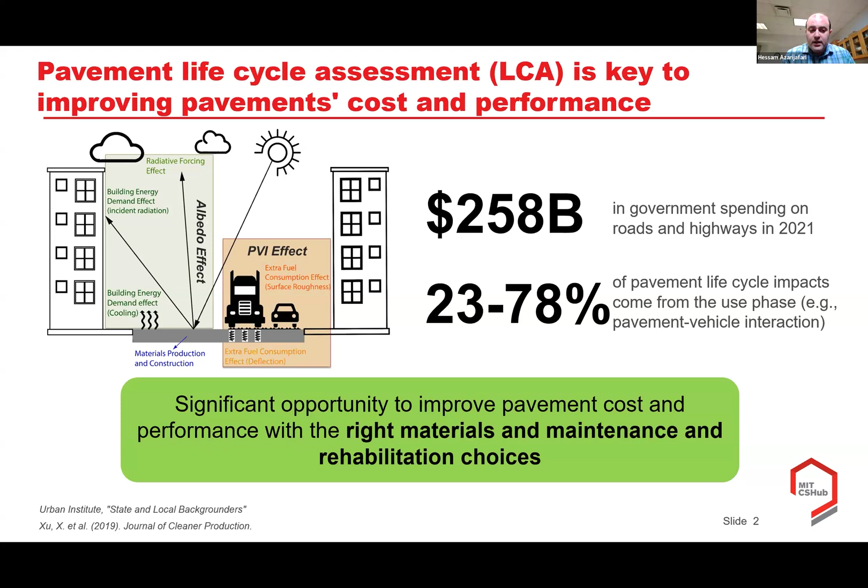So the environmental impact is not only the embodied emissions or environmental impact associated with the materials production, but 23 to 78% of these impacts come from the use phase and the impact of pavements on other parts of our built environment. But there is much awareness, fortunately, around including the life cycle and leveraging pavement as a solution in order to decarbonize the built environment.

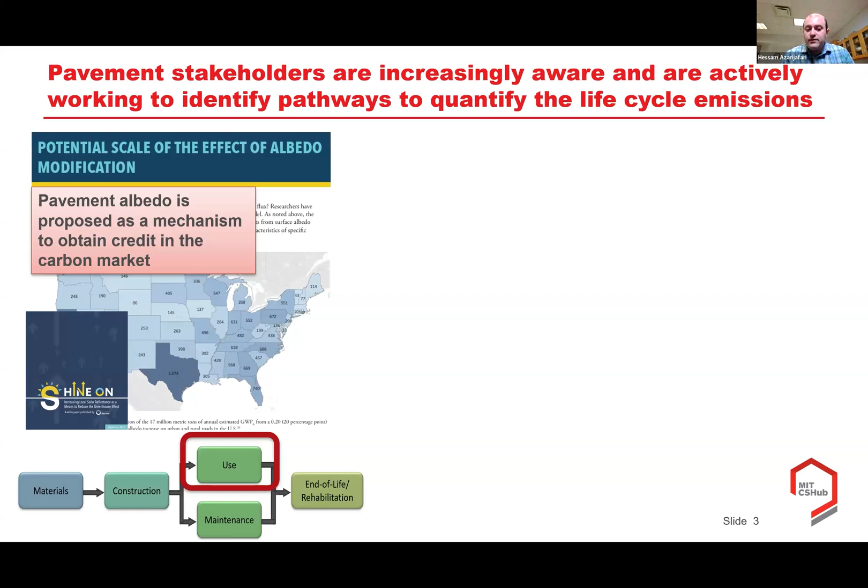This is a report that I'm sharing here talking about pavement albedo as a mechanism to obtain credit in the carbon market in general. So obviously, this is one part of the use phase. We have momentum around using carbonation or carbon uptake as a part of the EPDs for cement-based products. So pavement obviously is an important end-use application, and it's going to be included in the EPDs.

And on the other side, more recently, the Federal Highway Administration has formed a use stage technical subgroup to review the current methods and available tools in order to quantify the pavement vehicle interaction effects caused by the surface roughness of the pavements and also the structural performance as well.

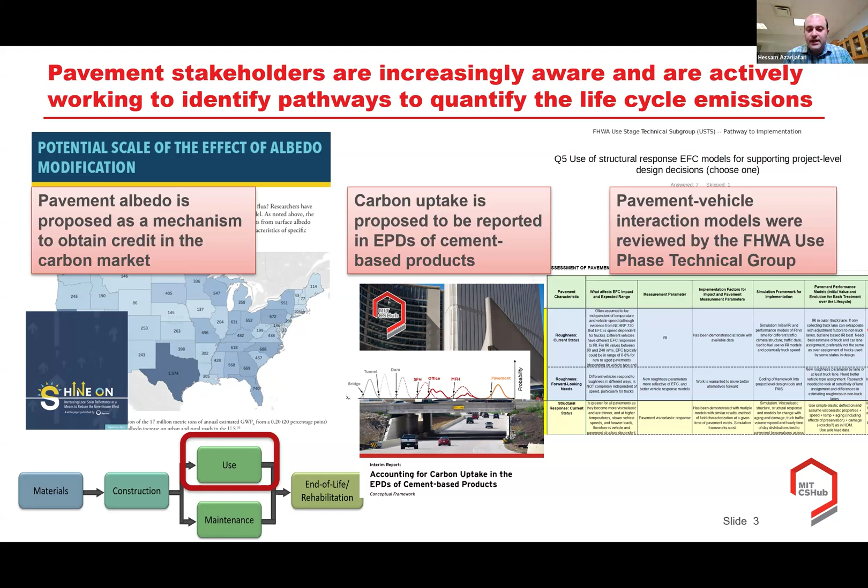So it's great that we have this here, but the question that we receive and the space that we are facing here is that LCA is generally complex, and obviously when we move forward in time, there is a little bit of uncertainty associated with the environmental impact calculation. So how can we make LCA easier, more accessible, and also include the uncertainty to understand to what extent our results' robustness can vary from one case to another, is the main question that we are tackling here.

I'm going to pause here. I'm going to hand it over to Dr. Haoran Li to walk you through the MIT solution to overcome these issues around pavement LCA. Haoran, please take it away. Okay, thank you, Hessam.

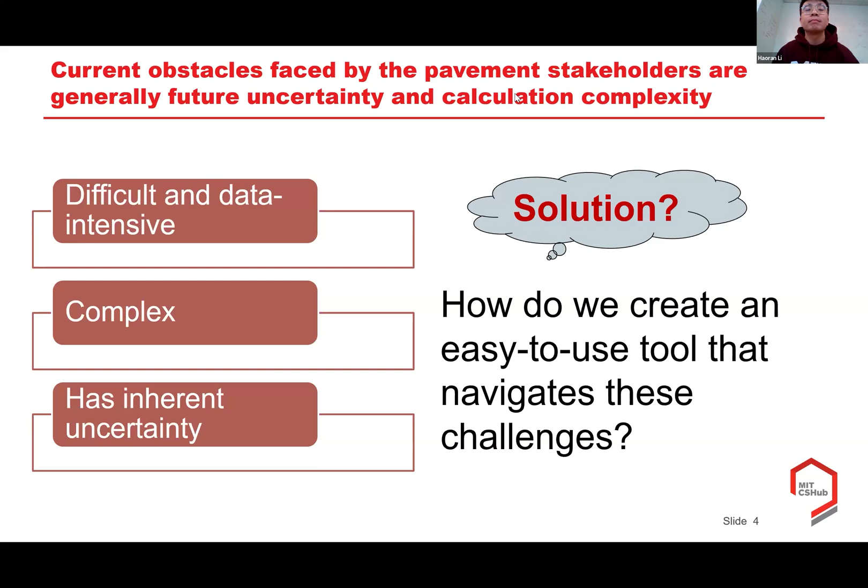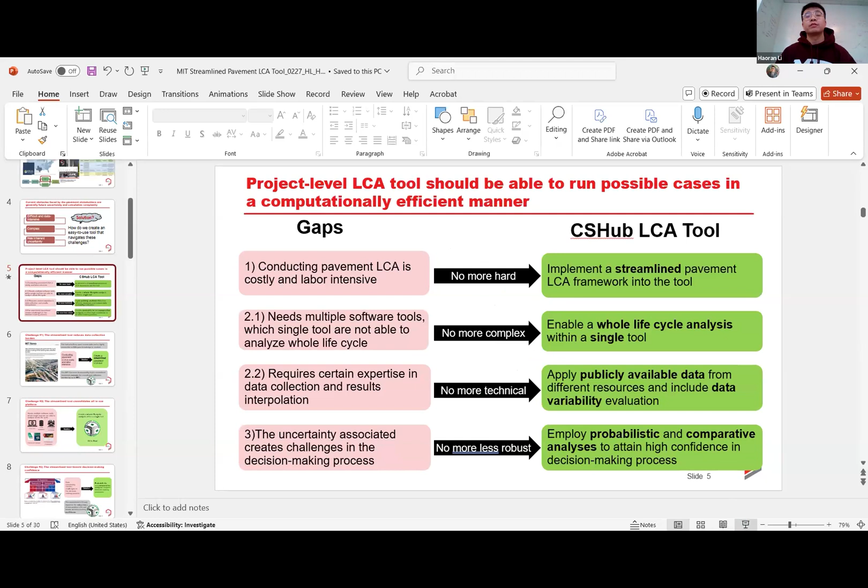Okay, starting my part. I will start to introduce a few challenges we have been facing and the solutions from MIT CSHub's efforts. So starting from the first one, as Hessam introduced. First, we observed that conducting pavement LCA is so costly and labor intensive. So we aim to introduce a new streamlined pavement LCA tool to make it as easy as possible for the user to implement pavement LCA, so it is no longer hard.

And the second challenge has two parts. The first one, for conducting pavement LCA, especially for the whole life cycle, we need multiple tools to perform that, including EPD tools, LCA databases, and even pavement design tools. But here, we are introducing a new tool, which integrates everything into one single tool to make it no longer complex.

The 2.2 challenge will be that implementing pavement LCA requires a strong background not only in LCA but also in pavement design, data collection, and pavement performance prediction, and also expertise to interpret the results, because a lot of tools give results which may be confusing for the real decision makers.

So here we collect publicly available data from different sources, but because of the source of the data there's a lot of variability or uncertainty. This tool is capable of embedding all the uncertainties in the final decision-making to make it robust with comparative results.

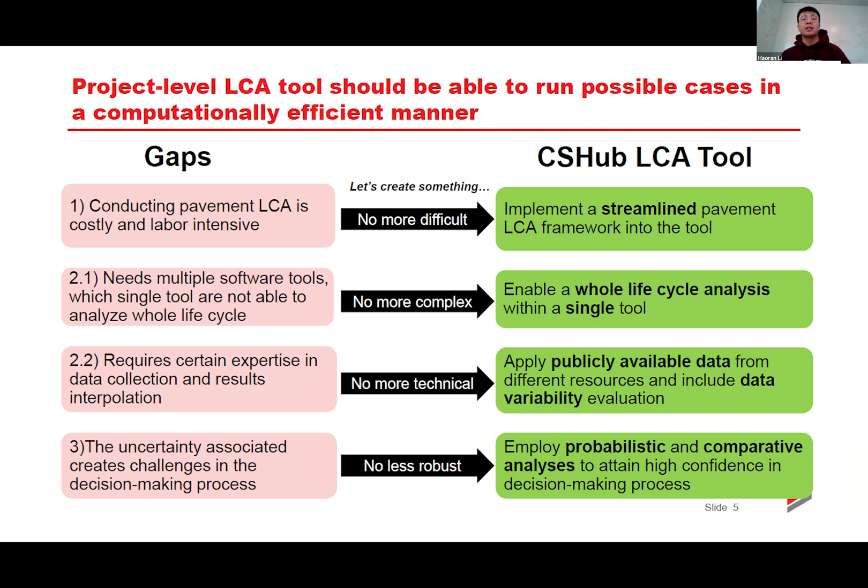So the first one, if you observe last year's news from MIT, we introduced a streamlined pavement framework before we constructed the tool. This framework was able to fix the first problem or challenge, and using this streamlined framework we were able to develop this tool.

This tool prioritizes the open source database and is accessible even with very little prior knowledge. You don't need that prior knowledge, so almost everyone can use this framework.

And lastly, the MIT CSHub Streamline tool is able to reduce the data collection burden by up to 85%, which means that previously data collection was so intense, but now we can reduce your data collection burden by up to 85% while still helping you make the decision.

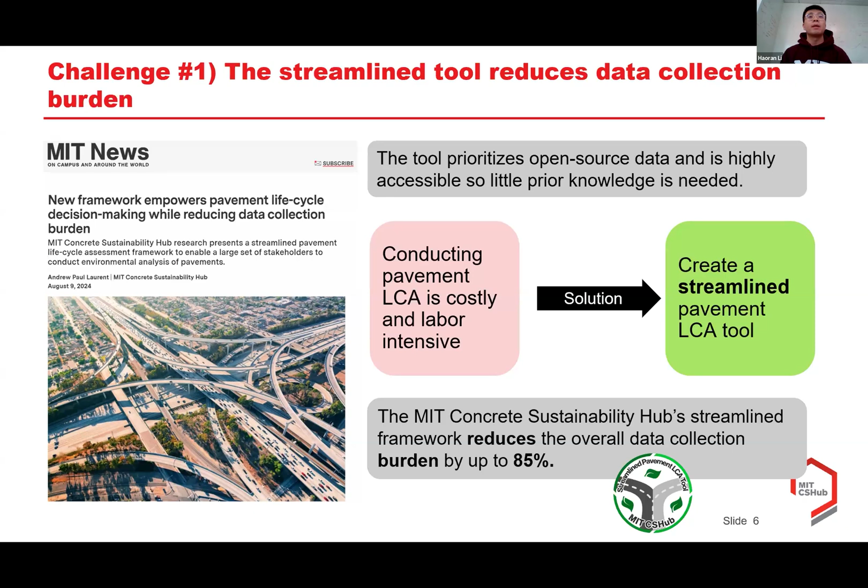As we just introduced, to implement the LCA tool you need different stages using different databases and tools—EPD tools, LCA tools, LCI tools, use phase modeling, and pavement design evaluation using different software. So now we have embedded and integrated everything into one tool.

We include the starting design stage of the pavement and use phase, including performance prediction and use phase emission calculations, as a whole tool within the whole life cycle.

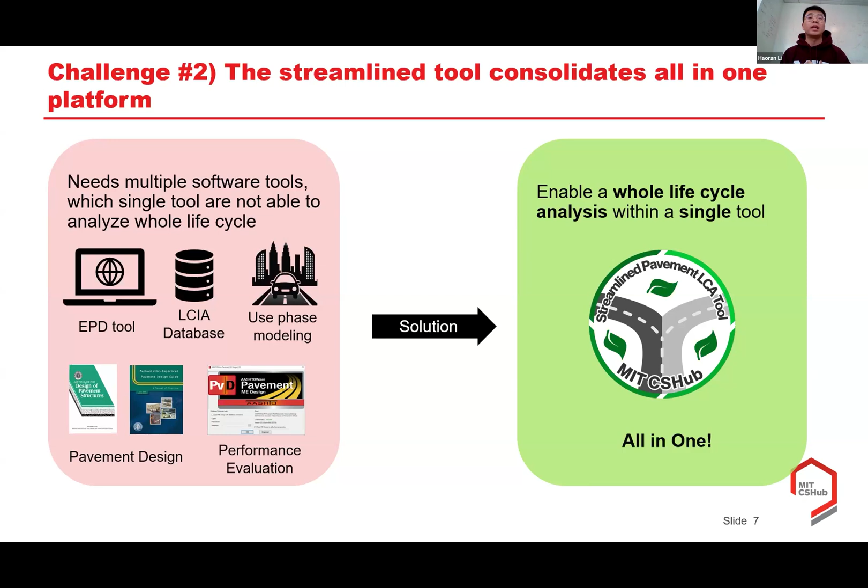The last challenge we introduced is uncertainties, because there's a lot of data uncertainty when we're collecting data, or users are using second-hand data from different resources. So here we streamline the processing by introducing probabilistic and comparative pavement LCA results.

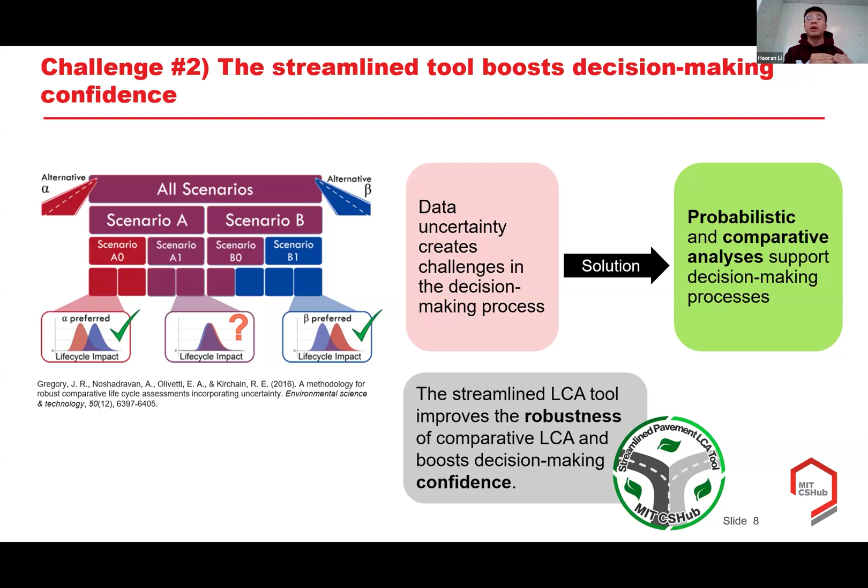So basically this helps decision making become less complicated, more robust, and more confident when users want to make decisions, especially when there are multiple pavement design alternatives or different materials to compare.

Okay, so here is the streamlined framework. We always start from collecting public available data—different pavement contextual data, geographic data, climate data, material properties, geometry design of the pavement, as well as traffic with significant components.

We also include the mixture design level of the material, including asphalt material and concrete material, as well as pavement design. As we introduced, we include both AASHTO 93 and AASHTO MEPDG design procedures.

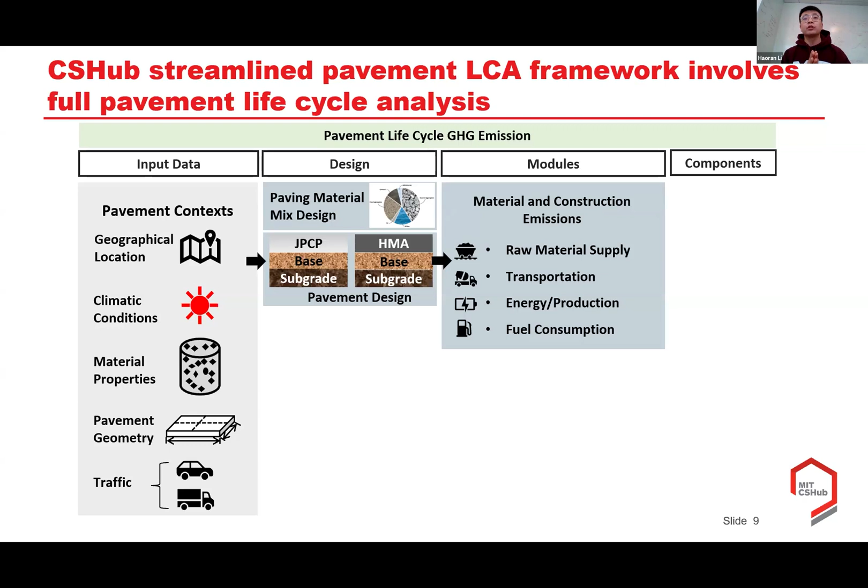For these, we're able to conduct our LCA database collection as well as embodied emission calculations. Also, the initial design of the mixture, material, and pavement geometry design will impact our long-term performance, as well as maintenance and rehabilitation.

M&R will also impact our use phase emissions, including different modules such as pavement vehicle interaction, radiative forcing, and the carbonation of concrete materials. Lastly, we include both embodied emission and use phase emission for the whole life cycle of the pavement.

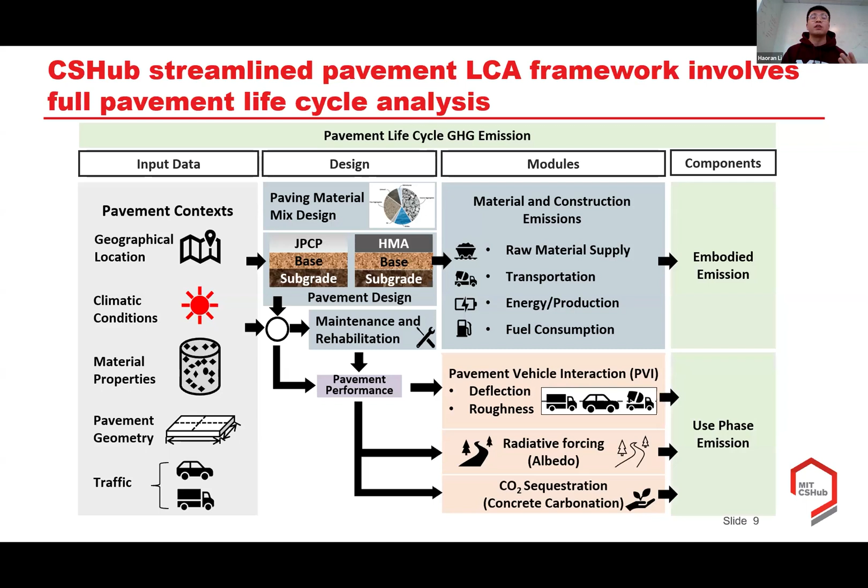So I'm very excited to introduce the beta version of the pavement LCA tool from CSHub. You can see here we have a user-friendly interface.

By clicking the sign-in button, you will be prompted to the dashboard, which is step 0—the user's dashboard showing your own case studies you have performed.

Because I'm a returning user, I have performed multiple case studies already. You can see that I named them differently for comparison, and they can also be named similarly.

But more importantly, after you perform different case studies, you're also able to edit the case studies you have performed. You're also able to clone, which is a copy-paste of the whole case study, and also able to delete if no longer needed.

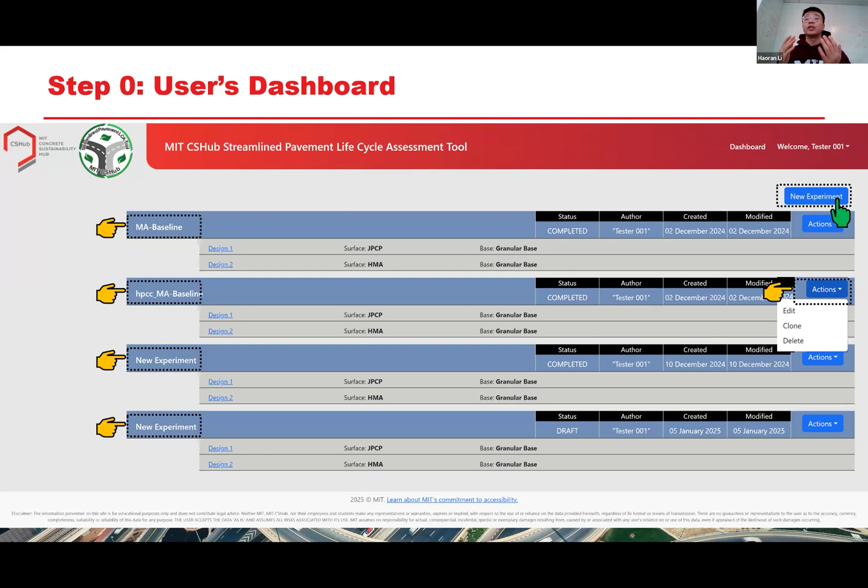For first time users, we're starting from the first page, which is Step 1, pavement context. We have the experiment name, where you can input your case study or project name. As an example, I'll use California Interstate Road. My current case study is for California, but all 51 case states in the United States can be analyzed, since we've collected all the climate data, traffic data, and geometry data.

For this case study, I'm referring to a rural interstate case study for California. On the right-hand side, you can see a lot of qualitative inputs. But for detail, especially for practical pavement design, pavement designers may need more data, particularly traffic data.

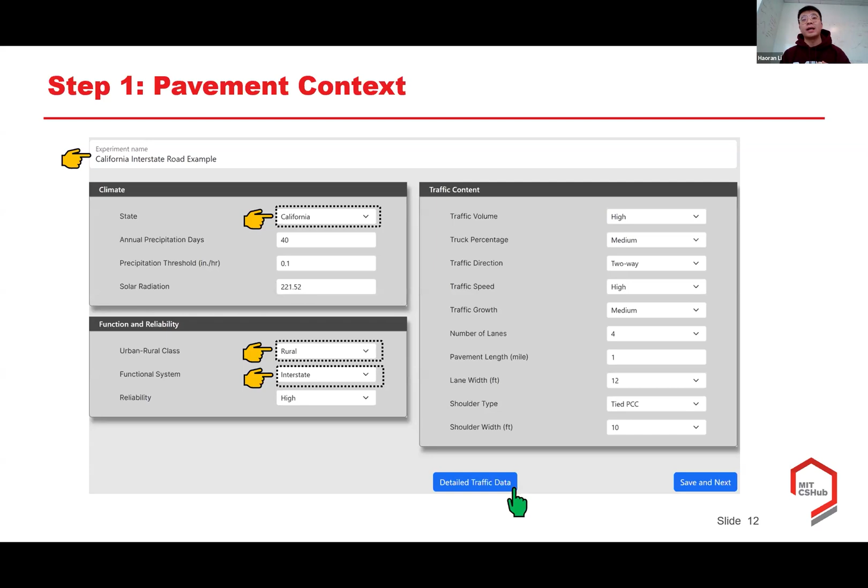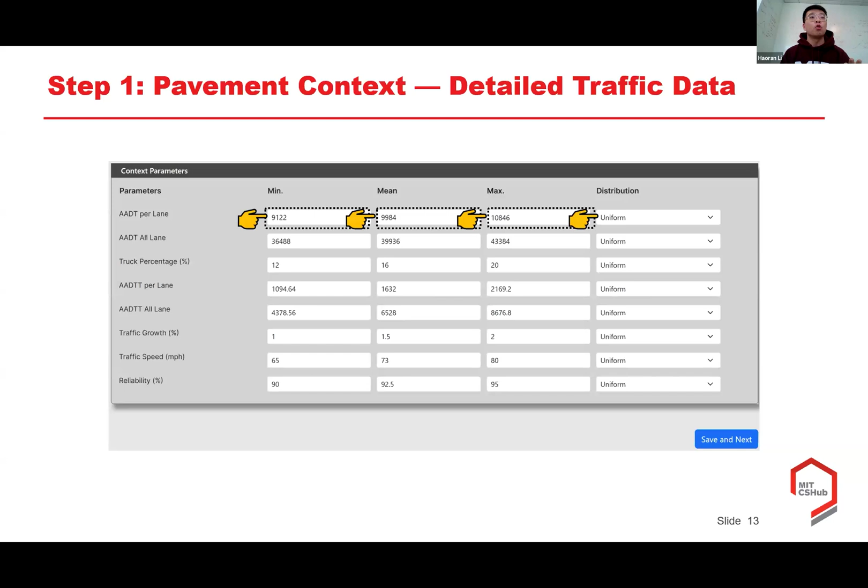We have this button to leverage traffic data for the implementation of pavement design. For pavement designers, you'll see all the traffic data here: AADT, AADTT, truck percentage, traffic growth, and traffic speed, all in the left-hand panel.

Because we include uncertainty in the pavement LCA, not only in the long-term performance but also in the design, you're able to include different distributions or uncertainty for your data, since you may have different inputs from different data sources.

For each traffic input, we include uniform distribution, normal distribution, log-normal distribution, which a lot of LCA users use, and triangular distribution. If you leave it as default, it will be uniform. You're able to change all of these based on your database, or give your own different inputs, and the others will compute correspondingly.

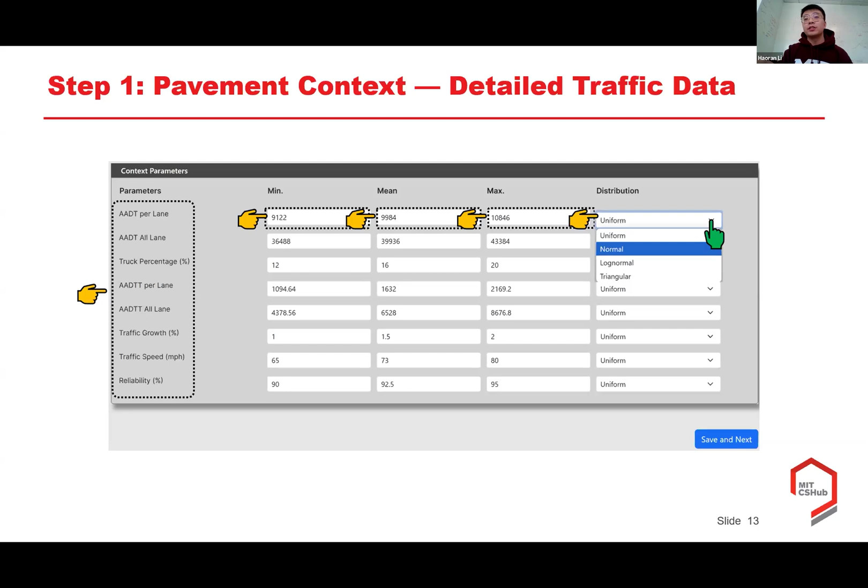By clicking Save and Next, we'll be prompted to the concrete material section, which is the material emission factor calculations. Again, we're using the California case study.

This will pop up the default California compressive strength of 4,000 PSI. We have a wide range of PSI values, and different categorical default values. Here we give the mixture level of the concrete material, which we've divided into different categories based on LCA database categories.

This includes A1 material, A2 transportation, and A3, the energy consumption related GHG emissions. As a sum, you'll see the total emissions as a unit for the material emission factor.

If you have your own EPD data, you're able to input it directly using the three numbers: A1, A2, A3. The program will compute that automatically for you.

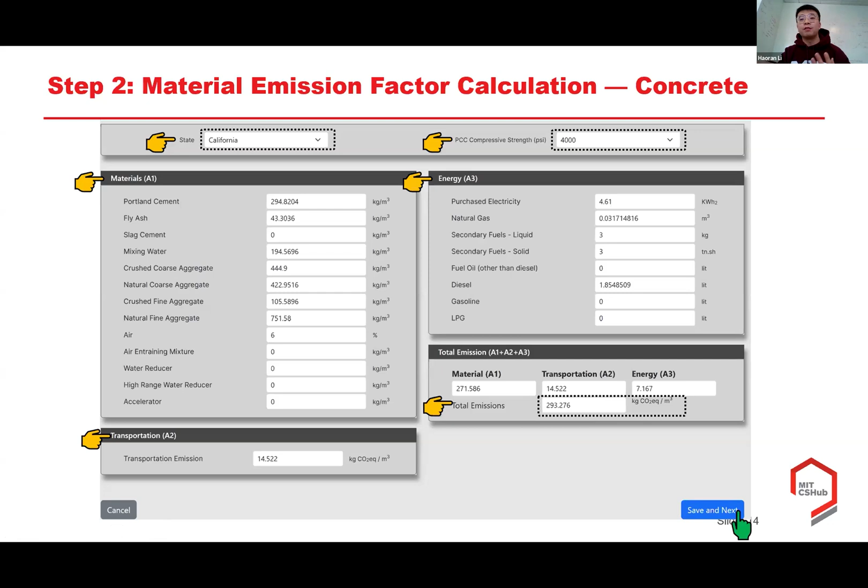If you click Save and Next, you'll be prompted to the asphalt mixture design and asphalt material emission factor calculations. Since this is California, we have defaults already for material A1, transportation A2, and energy A3. We also include the capability for you to directly input your own EPD values, A1, A2, A3.

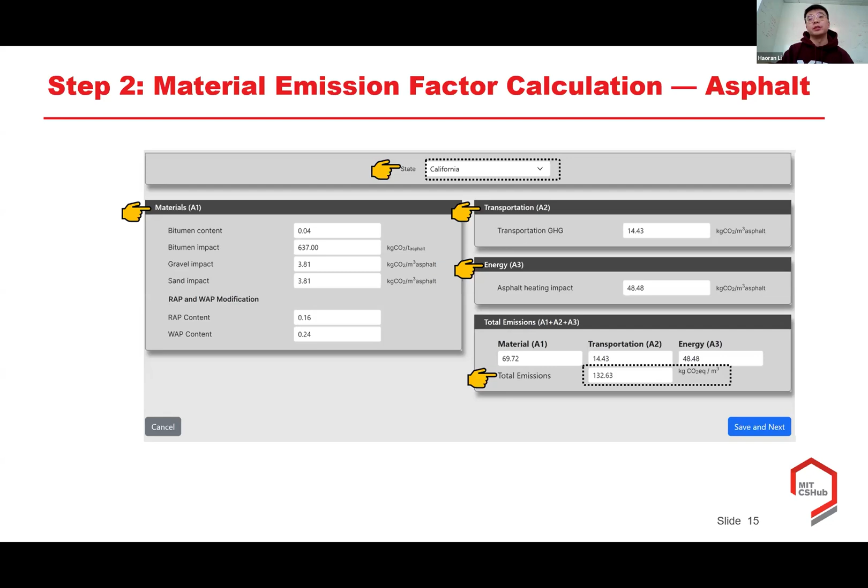For this case study, I'm implementing concrete pavement as Design One, which I call Design One JPCP, jointed plain concrete pavement.

Material properties, as pavement designers and engineers know, will not only impact pavement design thickness but also affect long-term pavement performance: cracking, faulting, and IRI. You can include uncertainties if you have them, or change values to all the same, for example the joint spacing, if you don't have any uncertainty for that.

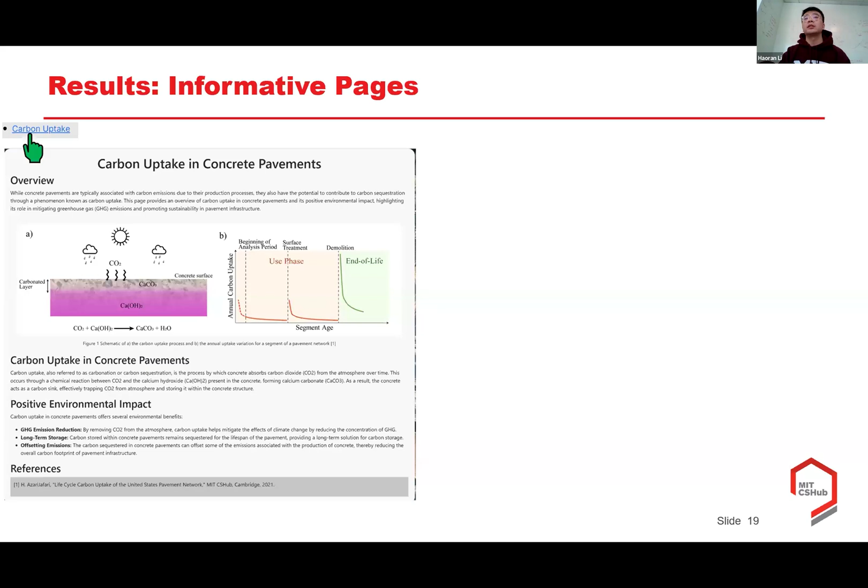You will also see a button for detailed reports. Here you're able to see details for concrete and asphalt pavement, design 1 and design 2 respectively. For design 1, you can see that the embodied emission, indicated in dark gray, is very significant in concrete pavement, but the use phase is relatively trivial compared to these embodied emissions.

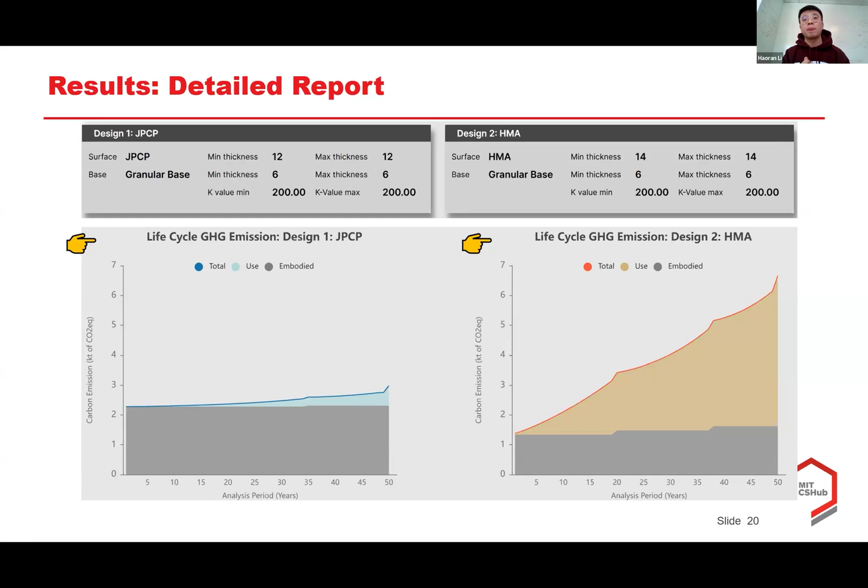For the asphalt pavement, even though embodied emissions are about 60% of that of concrete, its use phase emission is so significant, as introduced by Hessam. The use phase emission can range from about 23% up to 87% of the pavement life cycle perspective. So this gives the indicators.

And lastly, there's the probabilistic and comparative LCA results. If this is the first time you've seen that, don't worry—I will introduce another case study to show how we interpret these results.

Basically, we are comparing our concrete pavement with asphalt pavement based on our 100 Monte Carlo simulations, which represent 100 possible futures. For these 100 possible futures, how confident can we be in making decisions? Or for these 100 futures, how many times does concrete win, or how many times does asphalt win, in terms of environmental impact?

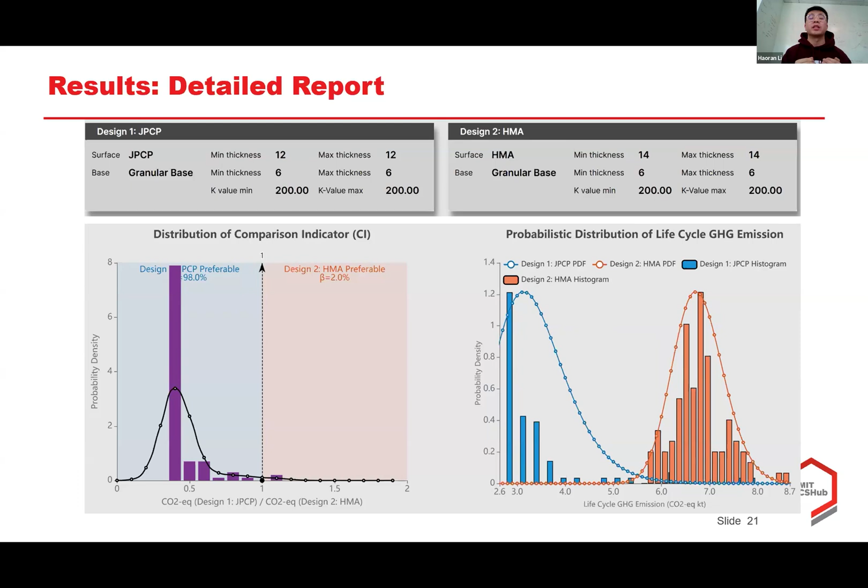Okay, so here I have a few case studies I want to share with you based on my implementation of these streamlined pavement LCA tools. So by using these tools, we have been able to perform a few case studies and a few papers we published and presented in both TRB and the International Conference on Concrete Pavements last year.

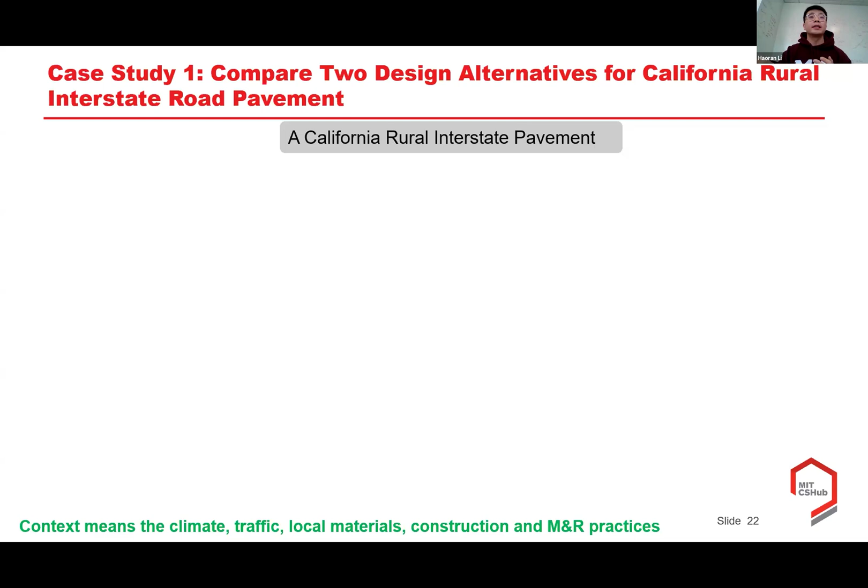So the case study I want to share is the comparison of two design alternatives for a California interstate road, as we just showed in the example in the previous screenshot. So for this road, we have two design alternatives, which we may be very familiar with. So for concrete, a 12-inch PCC surface layer with 1.5-inch dowel bars is usually used. And for the asphalt part, a 14-inch asphalt pavement is always another competitive design alternative.

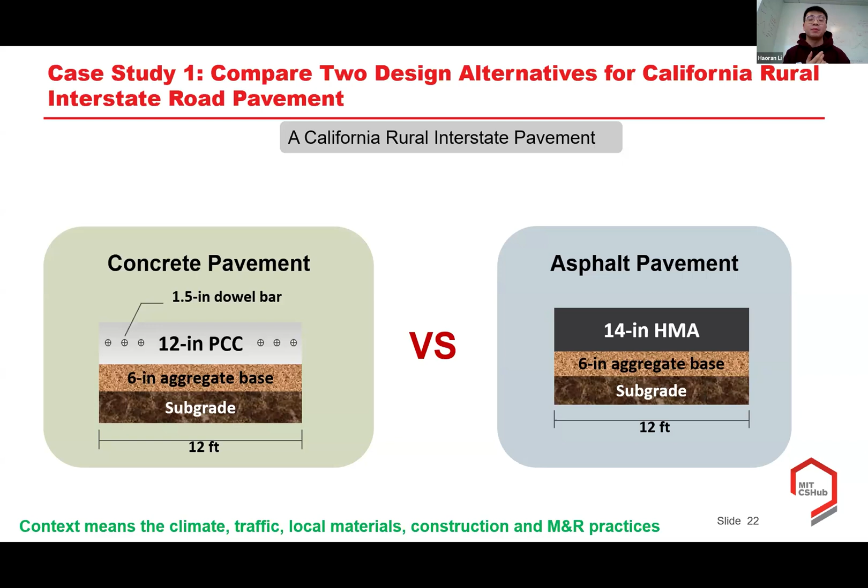So from the design perspective, we'll definitely expect that both the performance and long-term performance will meet the design threshold based on the MEPDG design procedure. But what about the life cycle perspective? And again, are we considering the context, which is the impact of material choices, and what will be the winner if we have uncertainties already in the data?

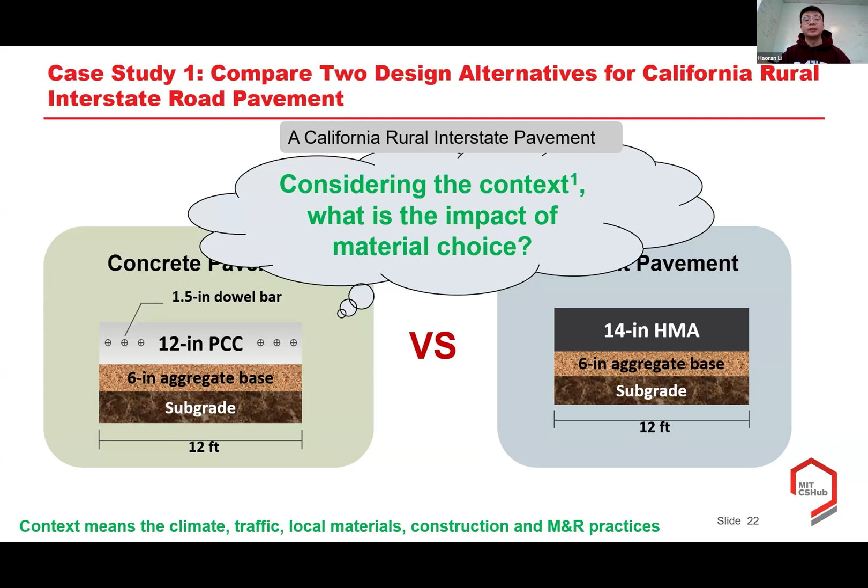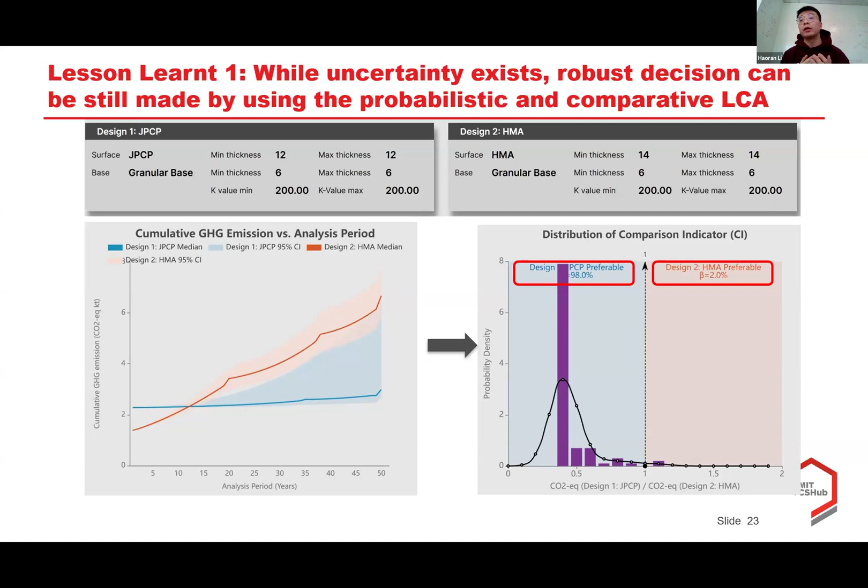And for this specific case study, we found that the concrete pavement, or JPCP, is preferable 98% of the time. And for the asphalt, it's 2%. Which means that in the 100 possible futures, concrete is the winner in 98 of them, and in two of them HMA is the winner. That gives the decision maker 98% confidence that concrete will be the winner, which is over, let's say, an average statistical confidence interval of 80% or 90%.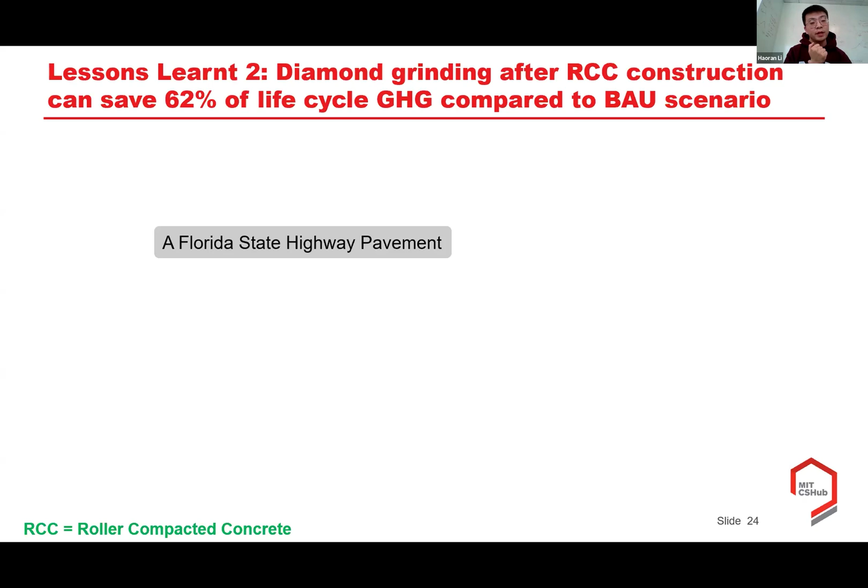The second case study, or second lesson, we conducted is for RCC, which is roller compacted concrete pavement. So as we all know, RCC is a relatively rougher-surface concrete pavement, and it does not have dowel bars in the transverse joints. But we all know that it could be a low carbon concrete pavement because it has more supplementary cementitious materials and low embodied emissions, but we do not know the long-term performance.

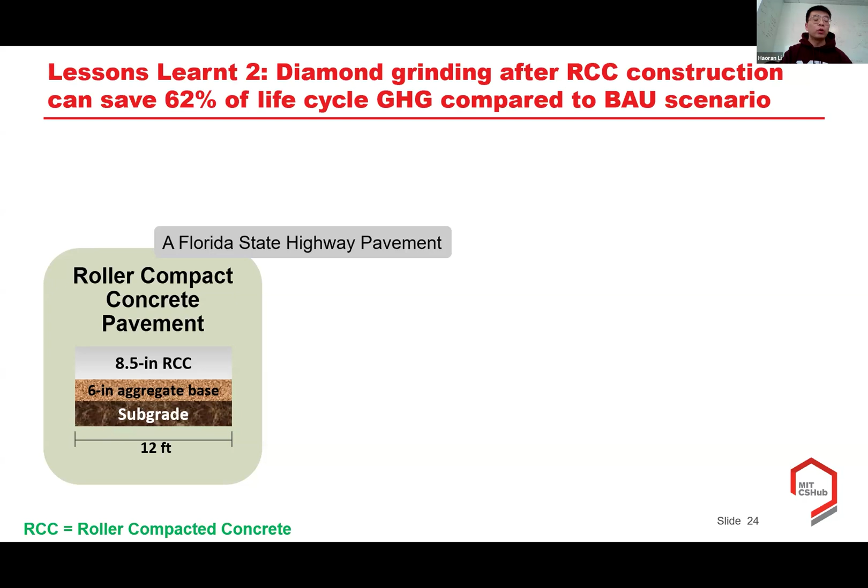For the asphalt pavement, we have a 6-inch HMA as a design alternative. So here we're analyzing a Florida State Highway pavement. For this one, yes, they all met the design procedure or design threshold. But how do we know which one is better from the environmental perspective? Here, we know that roller compacted concrete pavement is relatively rougher, and especially over long-term use, it will introduce more PVI-related emissions, specifically PVI roughness.

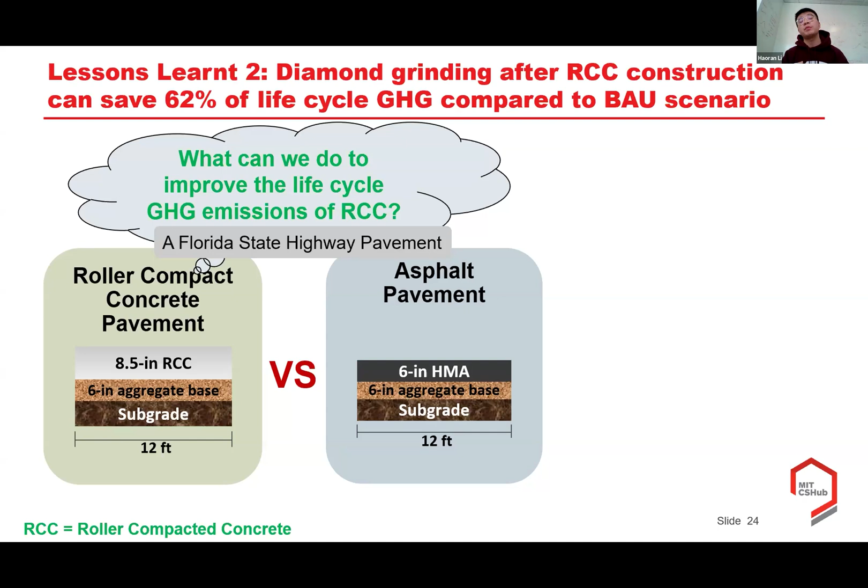And here, we are able to use the tool to compare. As you can see in the first bar chart, we call it RCC BAU, business as usual. It has such large life cycle GHG emissions, with significant components from the red part, which is roughness PVI, because it's a relatively rougher surface. But do we have the chance to improve that? Because we have the tool, we are able to change the default M&R schedule. So in this case, we performed a few specific analyses and case studies.

And we found that RCC with direct diamond grinding, which is the DG, after construction, could significantly improve its life cycle GHG emissions. Compared to the BAU scenario, we can see it has a 62% life cycle GHG reduction. And even compared to the HMA design alternative, we can save up to 57% life cycle GHG. So in this case, our tool has helped them improve the M&R for this RCC.

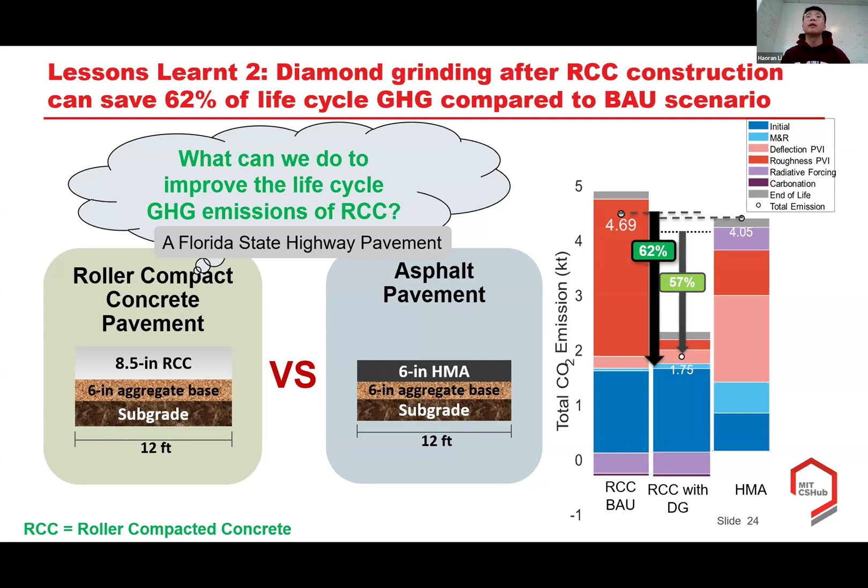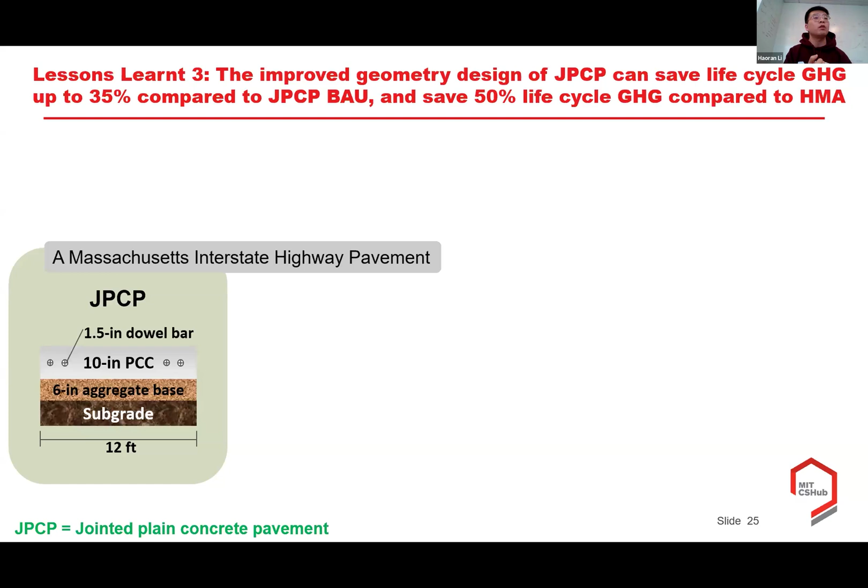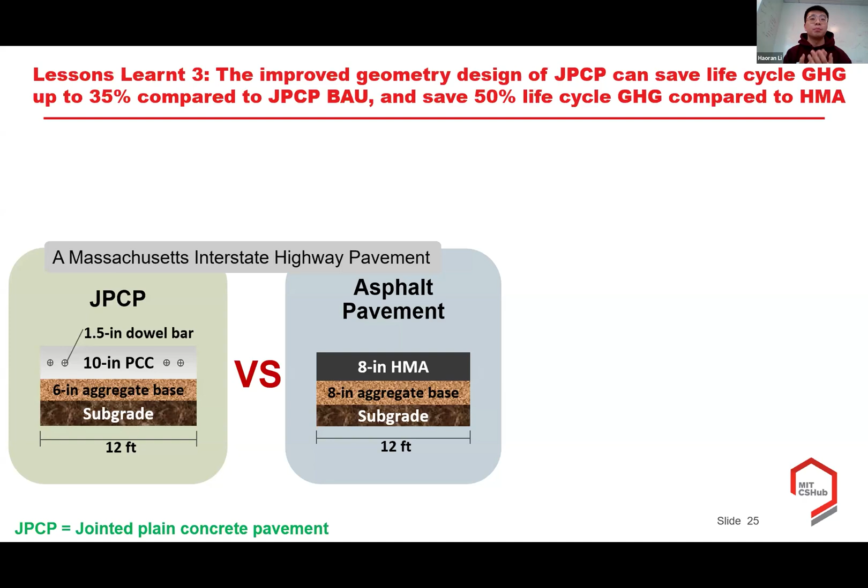And the third lesson we have learned is another case study for Massachusetts interstate highway pavement. For this one specifically, we have a 10-inch PCC with 1.5-inch dowel bars. For the asphalt pavement, we have 8-inch HMA layers as our design alternatives. For comparison, we can see that both definitely meet the design threshold and meet performance. And we see that the embodied emissions for JPCP will be much higher than the asphalt pavement.

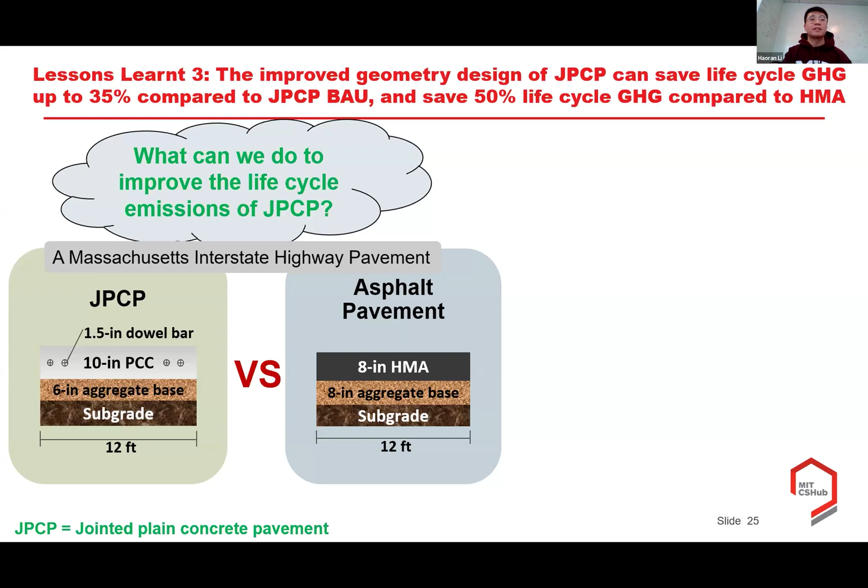This tool gives you the opportunity to change the pavement geometry design, specifically for concrete pavement, JPCP. We have the thickness, joint spacing, slab width, shoulder type, etc., to improve your geometry design, and also dowel bar diameters. In this case, we're able to perform a lot of case studies, sensitivity analysis, and trial and error to see whether you have the chance to improve your design without the loss of your long-term performance.

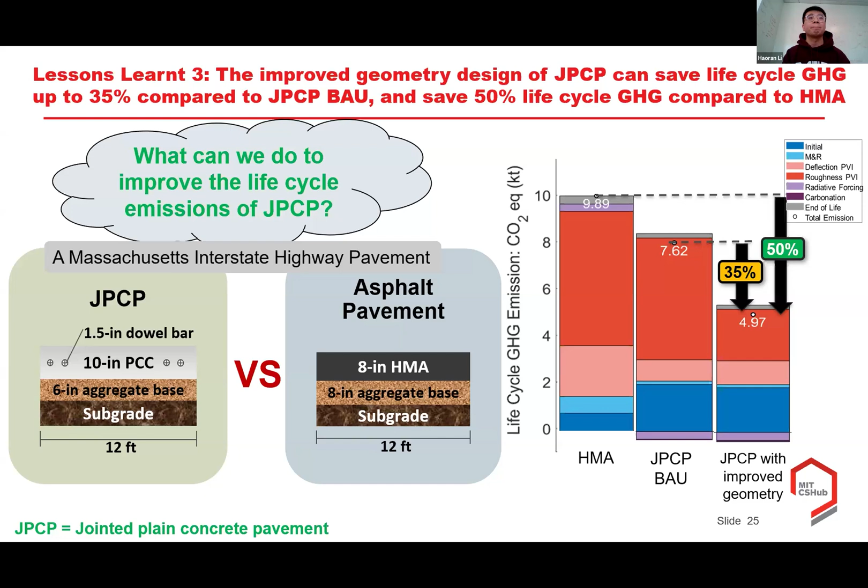So in this case, we see that the JPCP with the improved geometry can save the life cycle GHG up to 35% compared to my JPCP BAU scenario. And compared to my HMA, which is another competitive design, we can save up to 50% of the life cycle GHG. Okay, so we have performed a few case studies based on the tool already, and a lot of lessons we have learned from the tool.

So here are the takeaways. The first one, we can see that while uncertainty exists, robust decisions can still be made using probabilistic and comparative pavement analysis with the tool, which directly outputs probabilistic results. For the second lesson, we have learned that the streamlined tool helps us improve the M&R schedules. Not only JPCP, but also RCCP, and in the future it will include CRCP, which can significantly reduce the life cycle GHG emissions by improving their use phase emissions. And not only use phase, but also embodied emission plus the use phase.

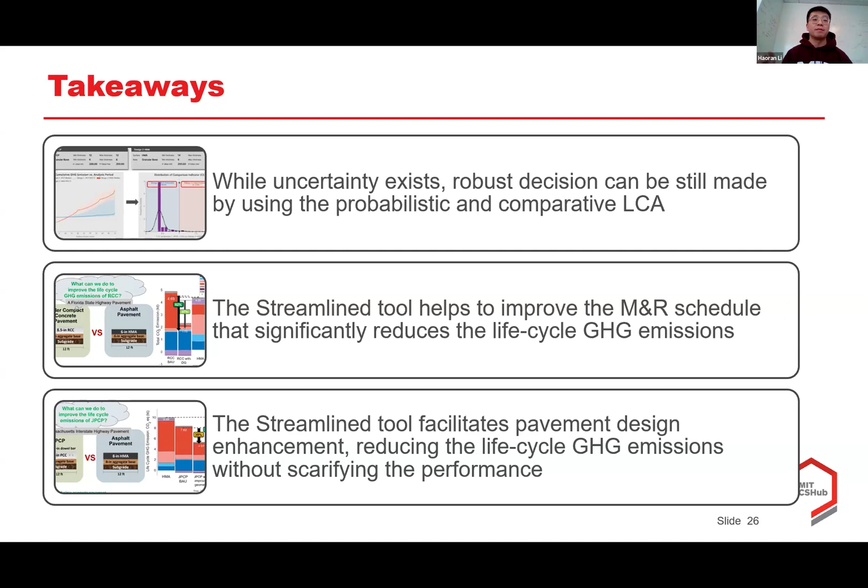The last lesson that we have learned is that the streamlined tool facilitates pavement design enhancement, reducing the life cycle GHG emissions without sacrificing the performance of the pavement. Okay, so if you want to investigate more lessons, it will be best for the real users.

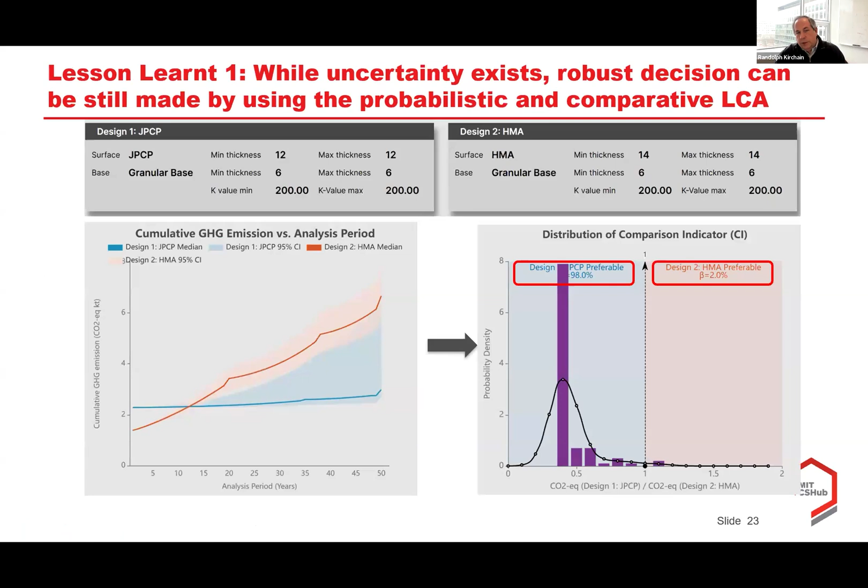Yeah, very good question. So I might interpret this as sort of what was the scope of things that could change essentially. Oh yeah. So the scope of the optimized design will be like without changing your materials, without changing what you already have, but change the things you could change as pavement designers or engineers. For example, the pavement thickness, joint spacing, slab width, shoulder type, and base type, and also the thickness.

So by doing that, you do not change the material you already have, but you can still improve your pavement. You can still reduce life cycle GHG without sacrificing your long-term performance. That's the goal for that geometry optimization.

Excellent. And then how would you think about using this kind of a tool for composite pavements, say? Currently, we do not have the composite pavement for the new design, but actually in the long-term maintenance in our M&R schedule, we have different options to repair the pavement. For example, for concrete pavement, we have both concrete overlay and asphalt overlay. And for asphalt pavement, we have different ones, and we also have concrete overlays.

If you mean specifically the composite materials, we haven't included that because they haven't had standardized design procedures for that. But in the future, as a next step, we can definitely include that when it is available. Yeah, so that addresses kind of a related question, which is, do we have the ability to analyze fiber reinforced concrete as an example? And I think the answer right at this moment is no, because in the mix design, say, we don't have that as an element in it. That's some good feedback of something that would be relatively easy, I think, to accommodate. So appreciate the question from folks like that.

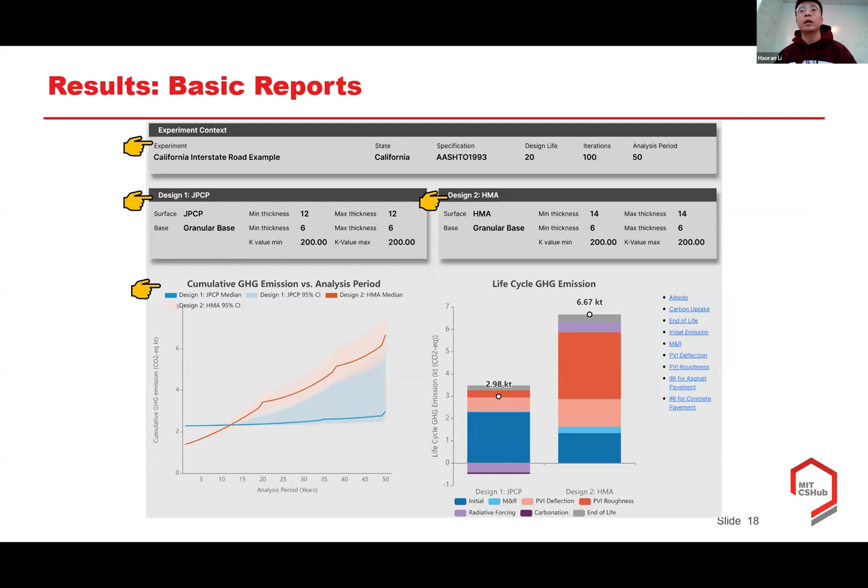So we had a question about the specifics of the roughness development model. So, does the roughness development that's used to get IRI roughness in the emissions graph come from the Pavement ME model for roughness? You mean this roughness, the RM model? So yeah, the RM model, yeah.

So it is derived from the machine learning models we have developed as surrogate models of Pavement ME. So basically, we do that by accelerating the Pavement ME or MEPDG prediction, which allows us to get a lot of different possible futures and possible IRI deteriorations for the pavement. And basically, this model is much faster than Pavement ME, but has high accuracy, the same accuracy as Pavement ME.

Yeah. So even though AASHTO 93 might be used for the design part, when we actually do the simulation of roughness and therefore how that translates into emissions and then eventually cost, those are coming from those surrogate models that are based on Pavement ME.

Yeah. Excellent. And then we have questions that keep rolling in here. I do want to address an earlier one. Our intent is to keep the tool free access. That's clearly our intent. I mean, there are a fair amount of resources required to make it possible, but that's certainly our intent right now.

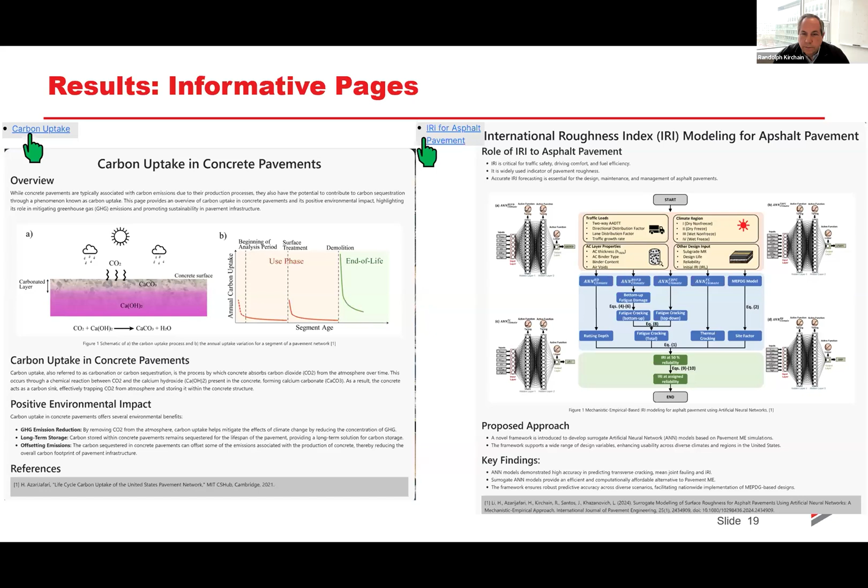Could we use this tool to compare specific concrete pavement design features like a 1 1/4 versus a 1.5 inch dowel, and how that would impact? Could we use it for that kind of detailed question? Yeah, definitely. So we have the concrete part as well. We have the dowel diameter implementation. You can input your different dowel bars and run it twice. And I think, Haoran, I've seen you show me cases where that can matter. So it matters. The tool is sensitive to that level of change.

And then there was an earlier question; we would be happy to work with any of the ACPA chapters to look into how we could tailor this to their state specifics. And then the last one, at least for now, I think Andrew's probably going to pull the plug on me pretty soon, is a comment that in California for concrete maintenance, they see a fair amount of slab replacement. So at 30 or 40 years, you might see 3 to 5% slab replacement. Is that something that can be captured in the tool?

Yes, absolutely. So here our M&R schedule is a default. It's relatively rough, just for general applications. California or any state, for example, we did a case study for Indiana, they have a very detailed implementation of M&R. We're capable of including full depth replacement, slab replacement, diamond grinding, concrete overlay, asphalt overlay, a lot of different strategies for M&R, and all of them will impact the long-term performance and also the life cycle GHG. Yes, you are able to change that.

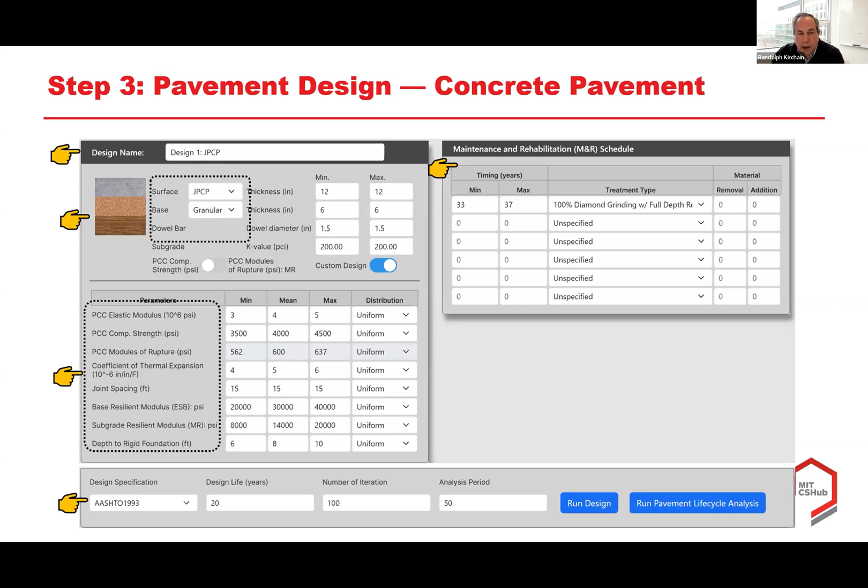Thanks again, Haoran, for this, and thanks to everyone for joining us. I really do want to reiterate a point that Haoran had made, which is that we wanted to get this tool out there, but we also recognize it's new capabilities. We really would love feedback on how to make this even more impactful. Anyone that's interested in how to tailor this to a particular state or possibly even to other countries, we'd be happy to talk with folks about that.